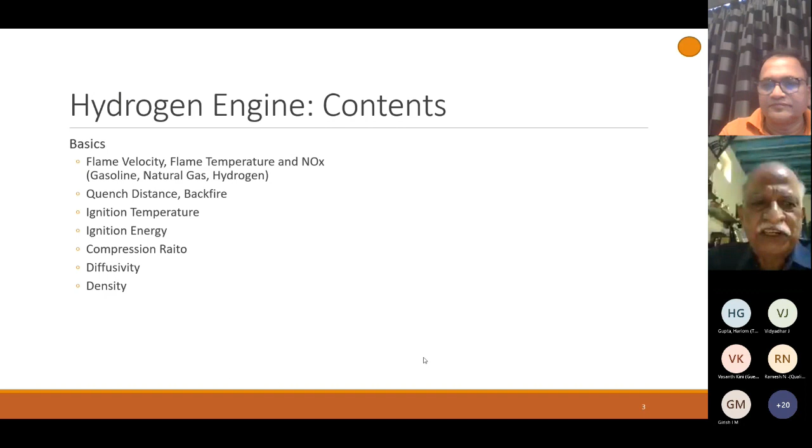Diffusivity and density. Based on these basics, we will describe the design challenges when we build a hydrogen engine, including ignition system, crankcase ventilation, and how we adapt hydrogen combustion to make it very efficient with less emissions within the engine, avoiding after treatment.

This drives us to the topic of lean burn engine, and lean burn engine with pre-chamber combustion seems to be ideal. We will give some practical examples which have been successful in applications like trucks, buses, and off-highway vehicles, where the duty is really heavy. At the end, we have listed references for those interested.

First, we will talk about combustion. Hydrocarbon combustion is very well known. When we burn hydrocarbon with oxygen, we get carbon dioxide and water. This is very simply said, but the combustion is never complete, so we get traces of carbon monoxide and hydrocarbon, which fall under the category of regulated emissions.

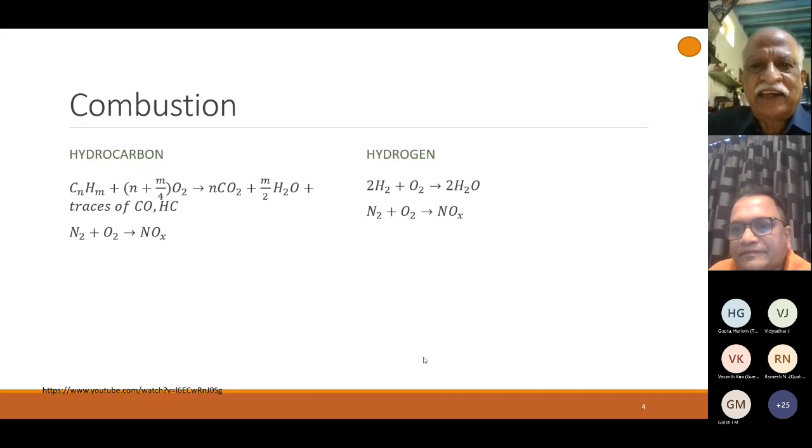Whereas we are able to burn hydrocarbon very well, hydrocarbon like gasoline or petrol, very well inside an engine at an air fuel ratio of 1.0, that is at ideal, chemically ideal proportion, we find burning hydrogen at chemically correct ratio produces exorbitant amount of nitric oxide, basically because hydrogen burns at a very high flame temperature. We will see the details a bit more later. So we got rid of carbon while we use hydrogen, but we still have nitric oxide.

So now we see the chemistry first, then we will see the physics of hydrogen combustion. We will see about flame velocity, flame temperature, and nitric oxide. We will also see what the flammability limits are of hydrogen compared to other fuels that we use today in spark ignition engines. We will talk a bit about the ignition energy and ignition temperature.

We have two types of flames, namely laminar and turbulent. You can see here the laminar flame is very quiet and very slow, and when it is turbulent, we find the flame front is wrinkled. On the right side, you will see a thin flame front, that is the edge of this flame, shown as a simple line, of thickness very small, delta L.

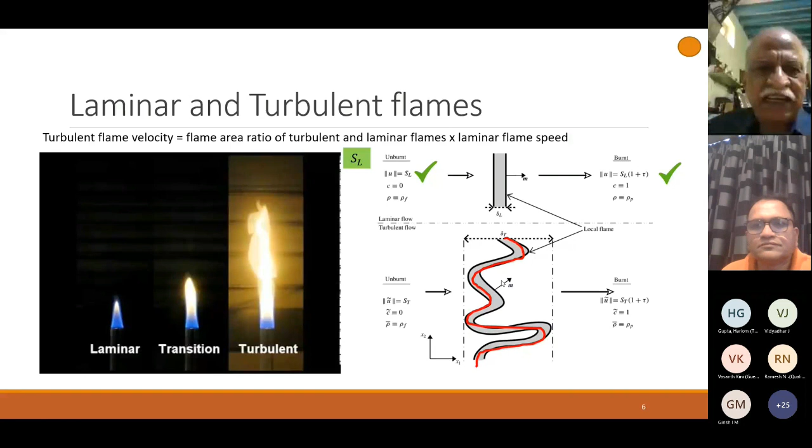When we look at the turbulent flame, we find that the flame area is enhanced, as shown by the red line. It is enhanced because the flame is highly wrinkled. So the flame area is essentially higher, but also the flame thickness apparently is more, and it is delta T. Delta T is higher than delta L, but it is looking like a brush.

The turbulent flame velocity is equal to the flame area ratio of turbulent and laminar flames times the laminar flame speed. If you look at a small infinitesimal portion of this wrinkled flame, it looks like a laminar flame. But the equivalent area of the laminar flame is many times higher than a normal laminar flame, and therefore we observe a very high turbulent velocity. That means the unburnt fuel has to move at a higher speed for the flame to remain at the same point in space. This is called the turbulent flame velocity. The burnt gases move towards the right at a higher velocity, which is enhanced by the increase in temperature.

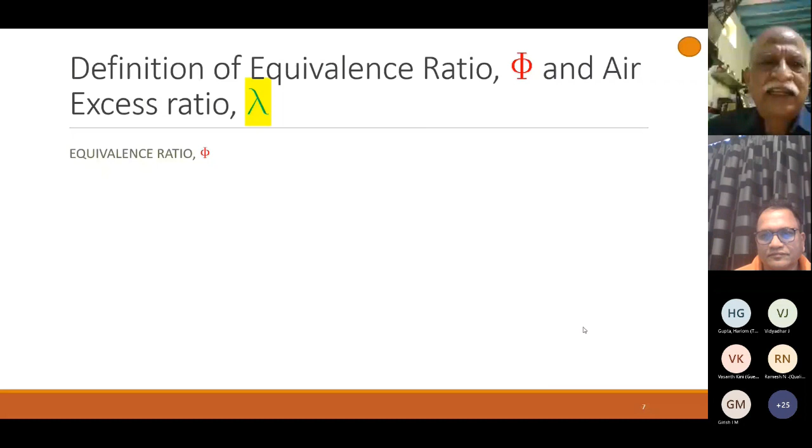Now we will define the equivalence ratio and air excess ratio. Engine engineers or designers like to use the term air excess ratio, while combustion engineers favor the equivalence ratio. So all the science of combustion deals with phi, and engine engineers handle lambda.

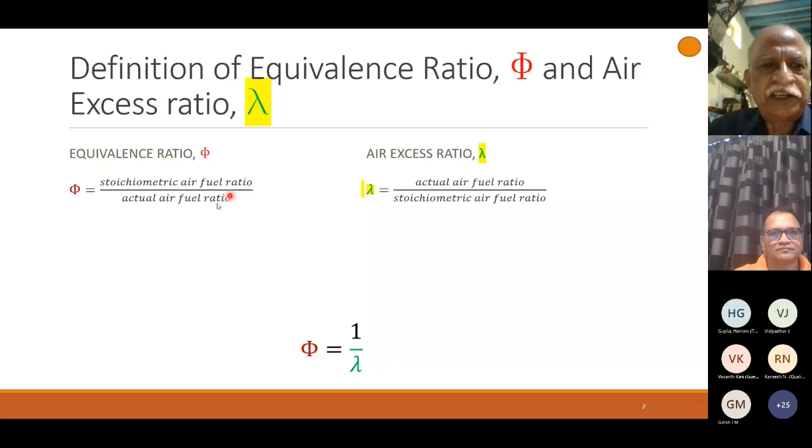The equivalence ratio is defined as the ratio of stoichiometric air-fuel ratio to the actual air-fuel ratio. Stoichiometric air-fuel ratio is the chemically correct air-fuel ratio. Lambda is the actual air-fuel ratio divided by stoichiometric air-fuel ratio. In other words, phi is the reciprocal of lambda. There is not much difference, but we must know this while studying the literature. When phi equals 1, combustion is stoichiometric.

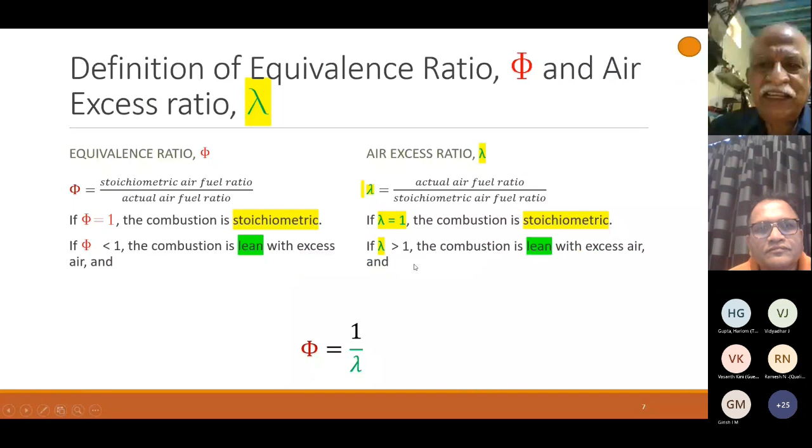When lambda equals 1, combustion is stoichiometric. However, if phi is less than 1, the combustion is lean with excess air, and for this, lambda should be greater than 1 for the combustion to be lean. And when phi is greater than 1, combustion is rich, and this corresponds to lambda less than 1. So we have defined the terminology.

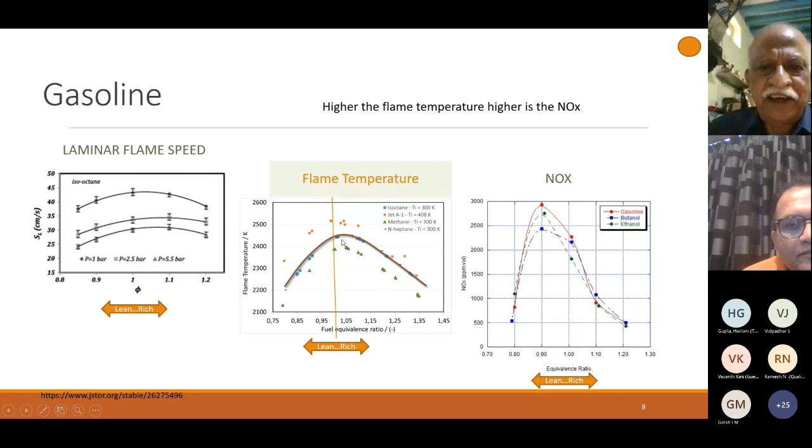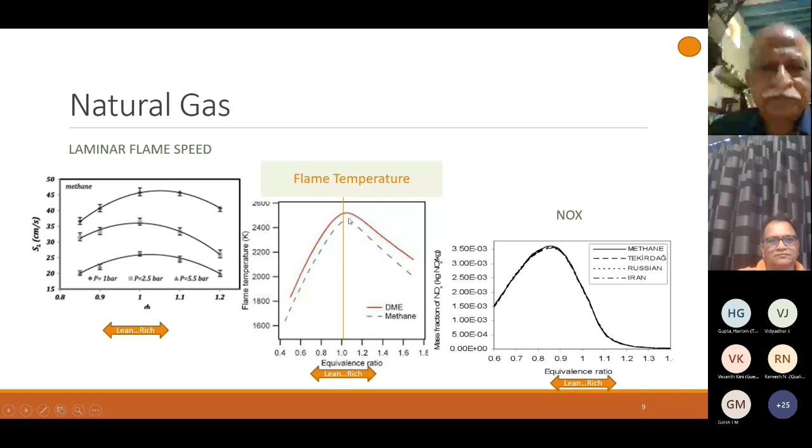Finally we come to hydrogen. It's very interesting - the graphs are similar in trend. NOx increases, then decreases, and around phi equal to 0.9, NOx is maximizing as we have seen in other cases. The flame speed also seems to maximize somewhere around equivalence ratio 1, but here you will see it is maximizing around 1.5, very near to 1. But the laminar flame speed is 7 times faster than gasoline or natural gas, so hydrogen burns very, very fast.

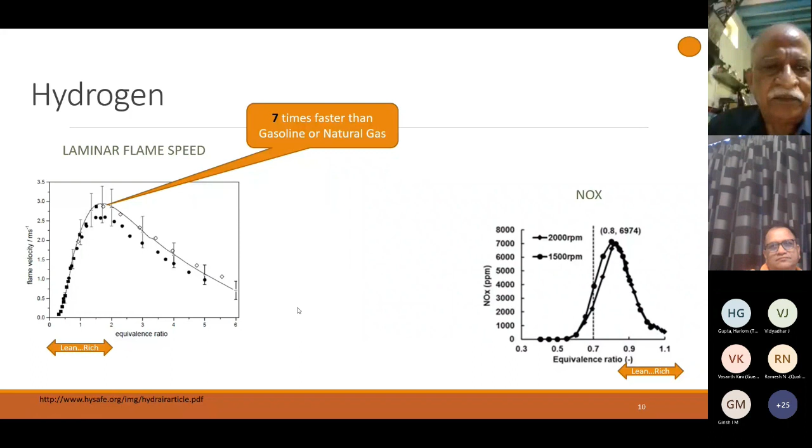The flammability limits of hydrogen are really very, very wide. We'll see the details in the next slide. If you take any fuel and have too much of it, the flame does not sustain itself. Or if you have too much air or oxygen, the flame cannot sustain itself and will be cooled by the excess air. So there is a very small range of fuel concentration where this flame can sustain itself and not be quenched or stopped. This is known as the flammability limit, and you have both upper and lower flammability limits for any fuel-air mixture.

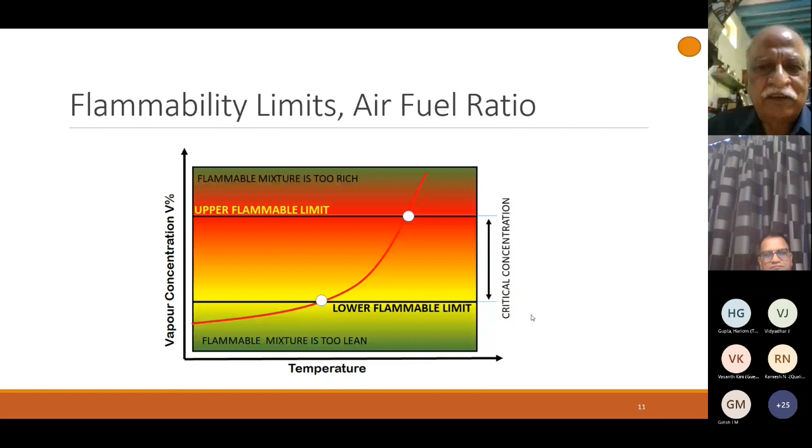We'll see some of the fuel-air mixtures we come across in daily life. First we see diesel, where we've plotted the fraction of fuel in air as volume percentage. The top one is diesel. On the left side you have lean and on the right side you have rich fuel. This arrow shows where the stoichiometric mixture lies. So essentially, we have a very narrow range for diesel flame to sustain.

Next we have methane, which is nothing but natural gas in essence. That also has a flammability limit range, slightly wider than diesel but not very wide. The width is around 10%, whereas for diesel it is about 5%. If you go for gasoline, you have a width of around 6.6%, which is slightly better than diesel and less than methane. That is because the number of hydrogen atoms per carbon in gasoline is more than in diesel.

If you come to hydrogen, you see the stoichiometric composition is somewhere here, also shown on the right side by this arrow. We have very wide flammability limits, meaning the range is from 4 to 75%, which is really very wide. Some of the calculations are given on the right side on top, showing how to estimate the stoichiometric composition.

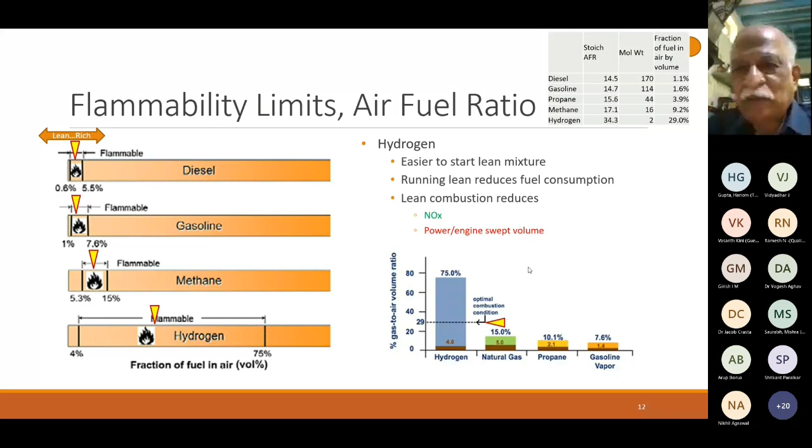Some of it is absorbed by the heavier molecules. So we don't want to increase the number of atoms per molecule in combustion. If you are able to run it lean, you are able to run the engine more efficiently. We will see some of the graphs after some slides. So lean combustion therefore reduces nitric oxide because we are reducing the temperature, and this has got a disadvantage: if you try to run lean, you burn less fuel, therefore you produce less power, so power to engine swept volume can drop. We will see how we can solve this problem.

Next is ignition temperature. Ignition temperature of hydrogen is very high. Of course, natural gas also ignites at a high temperature, but somewhat less than hydrogen, whereas gasoline can be ignited at a lower temperature. More interesting is diesel, which can ignite at a still lower temperature, but we are not considering that here for comparison, because we are going to burn hydrogen as a spark ignition engine fuel.

We cannot run it as a compression ignition engine fuel. Why can we not run it as a compression ignition engine fuel? The question is answered here itself: the ignition temperature is so high that regular compression methods cannot reach this temperature inside an engine. So this table gives the comparison of hydrogen and gasoline for ignition temperature.

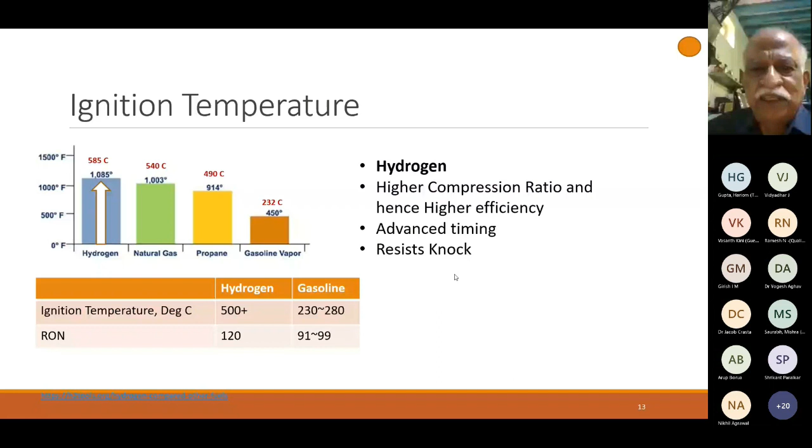Now we can go for higher compression ratio, and thermodynamically we can reach higher efficiency because of higher compression ratio. Also, we can go for really advanced timing and improve the efficiency of the engine. And hydrogen ignites at a high temperature, therefore it can easily resist knock. So we can advance timing and increase compression ratio without any nuisance of knock, which is a big problem both in gasoline and CNG engines.

Now comes the ignition energy. Interestingly, though we need high ignition temperature, we need very less ignition energy to strike a fire in a hydrogen air mixture. So hydrogen is easy to ignite a lean mixture. If we compare gasoline vapor, which needs 0.24 millijoules to be struck across the spark plug, in case of hydrogen we need only 0.02 millijoules to initiate fire inside the engine. So it is a very small amount.

But one difficulty is we should not have any hot spot inside the engine, like carbon deposit, which can initiate combustion inside the engine. Fortunately, we don't have carbon in the fuel to form a hot spot in a hydrogen engine, but the oil that passes the piston rings can form cakes after partial combustion and become a hot spot in a hydrogen engine. So we should try to avoid hot spot formation or cake formation due to oil burning inside the engine.

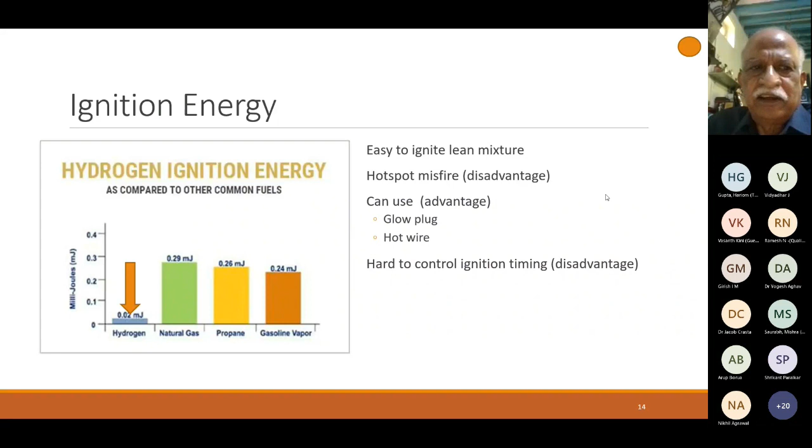So because the ignition energy is very less, accidents can happen. There are places where hydrogen is stored, and if it leaks into the surroundings, even a small spark of very low energy can create a big fire. So what we have to do is avoid unintentional mixing by using only hydrogen compatible materials and consider design and safety factors to prevent leaks.

We should anticipate ignition mechanisms and control them so that we can ignite the hydrogen oxygen mixture at our will. Last, we have to adopt the best practices and implement safe practices with inspection, assembly, operation, maintenance, etc. So these three are to be taken care of.

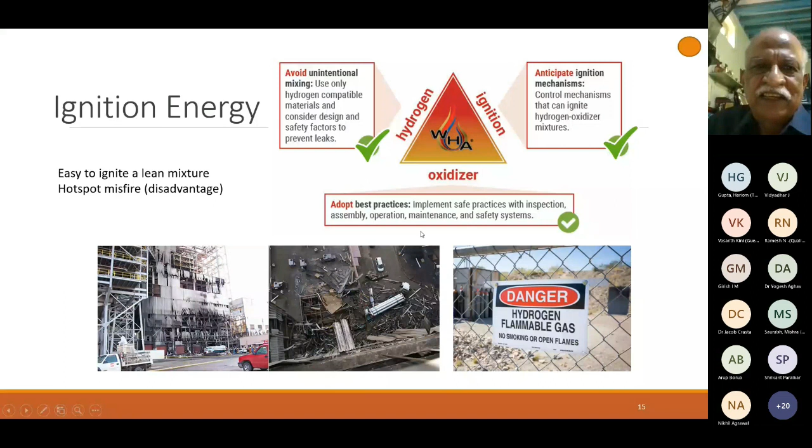And of course, we have said we can enable very high compression ratio. The theoretical Otto efficiency says your thermodynamic efficiency increases as compression ratio increases. Higher the compression ratio or the specific heat ratio, higher is the indicated thermodynamic efficiency. So we can enable a high value of gamma, or ratio of specific heats, by running the engine very lean. Compression ratio is limited by resistance of the fuel to knock, and this fuel is knock resisting, so we don't have a problem. A lean hydrogen mixture is less susceptible to knock than conventional gasoline and therefore can tolerate high compression ratios.

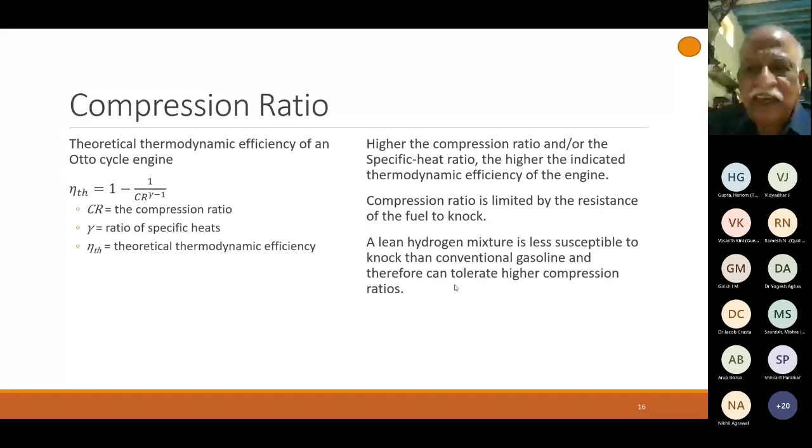So we are driving towards these parameters. We can go for high compression ratio. We can go for a lean mixture for better efficiency as well as lower nitric oxide.

If you see the thermodynamic efficiencies, you can beat diesel when you use hydrogen. That means you can get up to 5% better thermodynamic efficiency, or fuel consumption will be at least 10% better in case of hydrogen. This 10% is based on the calorific value of hydrogen. If we consider the grams of fuel consumed, hydrogen consumption will be around one third of diesel, basically because hydrogen has a lot of calorific value, that is calories per gram of hydrogen.

So if you get, in case of diesel, 190 grams per kilowatt hour, if you run hydrogen you will get around 80 grams per kilowatt hour. So now we have seen some of the chemistry. We will see the physics of combustion.

We'll see the flame quench distance and backfire. Quenching distance is known for a long time, as we have seen in Davy's lamp. This lamp was invented by Sir Davy for use in the mines. The flame inside the lamp will not propagate to the outside where there is a lot of combustible gases in the mines. The flame does not travel outside because the holes are so small, smaller than the quench distance, and the flame is quenched at the hole itself.

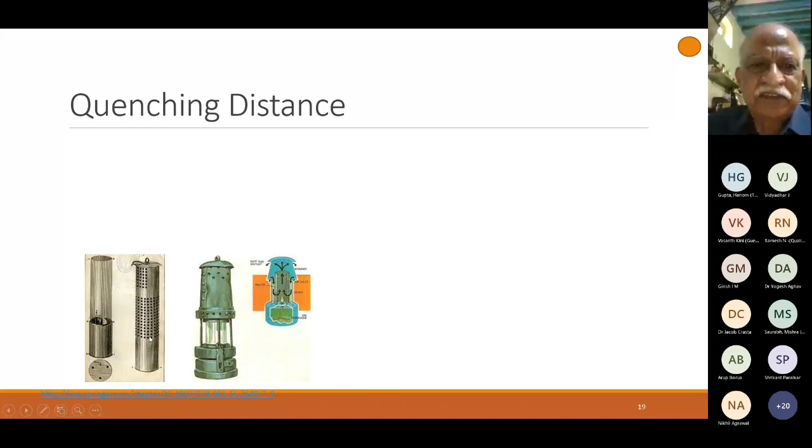We'll see one picture. If we have a small hole and there is a flame propagating from left to right, it will be stopped at the hole because the hole has more surface area, and it loses heat vigorously. So the flame is stopped ahead of the hole. This is the principle of Davy's lamp.

Modern science says if you plot the quenching distance and spark ignition energy on a log-log plot - that is, a logarithmic x-axis and logarithmic y-axis - you will find these two parameters, namely the ignition energy and the quenching distance, fall on a line.

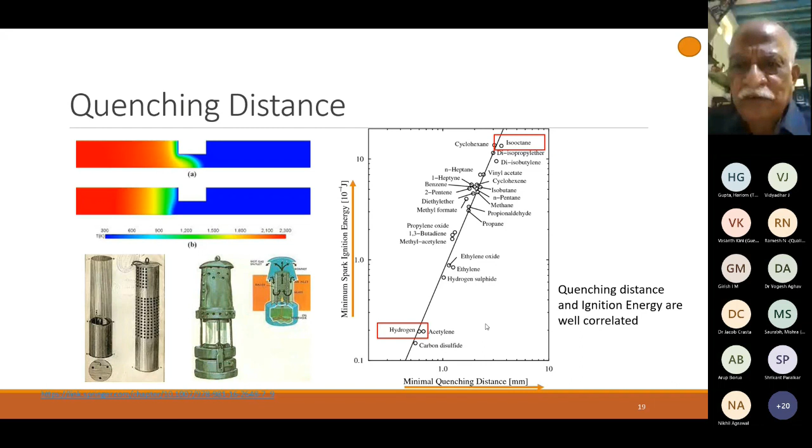Isooctane, which is nothing but gasoline, is somewhere at the high end. That means it needs a lot of ignition energy, which we saw in the previous slides, and also the quenching distance is high. Hydrogen is at the lowest end - it has a very low ignition energy and a very low quenching distance. So ignition energy and quenching distance basically arise from the same physical phenomenon, and we find an excellent correlation between the two parameters.

We'll see a table here. You can see hydrogen has a quenching distance of 0.64 and gasoline 2.8. So we can handle gasoline somewhat better than hydrogen, especially near the valve seats. We'll see the example. Also, the ignition energy is shown here - it is 2 times 10 raised to minus 5 joules for hydrogen, and for gasoline it is 24 times 10 raised to minus 5 joules.

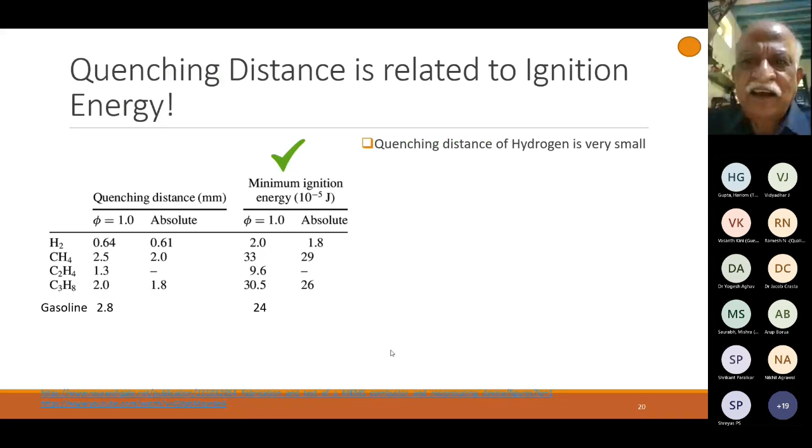So quenching distance of hydrogen is very, very small. Therefore, hydrogen burns very close to the wall of the combustion chamber, and this can cause backfire.

How does backfire take place? We have an engine here, and we cannot ensure perfect sealing between the valve and the valve seat in the cylinder head. If the imperfect seating is larger than the quench distance, then the fire can propagate from the engine cylinder to the inlet air. This can propagate up to our fuel admission point, and the entire thing can cause a startling noise - it can frighten a person running the engine. So backfire can pass through minute gaps at the valve seats.

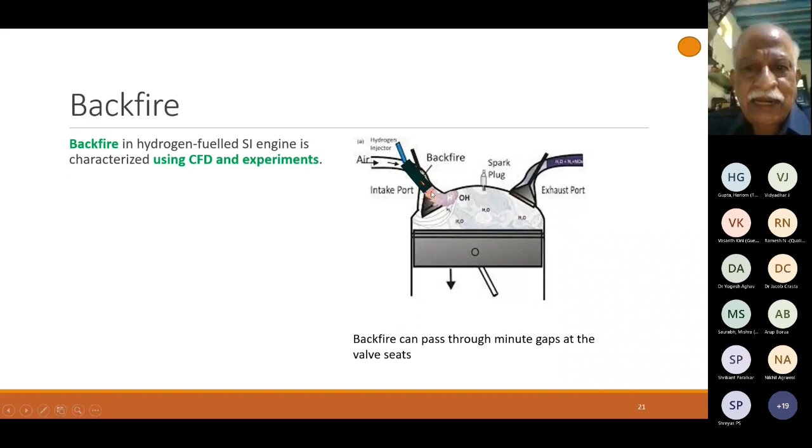Backfire in hydrogen-fueled SI engines is characterized using both experiments and CFD. CFD helps a lot here to characterize this backfire.

Of course, the fire can be sustained only if there is sufficient temperature available. So the hotspot's minimum temperature for occurrence of a backfire is 950 K, which is around 670 degrees centigrade. We should not have any hotspot, or if at all we have a hotspot, the temperature should be less than 670. So the spark plug, or anywhere there is a carbon deposit, should be maintained at a temperature less than 670 by proper cooling. Hotspot location does not influence backfire except for the timing of its origin.

Backfire propagation is characterized by deflagration. Deflagration is not an explosive combustion - it is a gradual propagation of fire, but it can be irritating and sometimes frightening. So we have to maintain the spark plug and the exhaust valves, or any other possible hotspots, to temperatures less than 950 Kelvin, which is around 670 centigrade. These have to be simulated by CFD to check the danger of backfire.

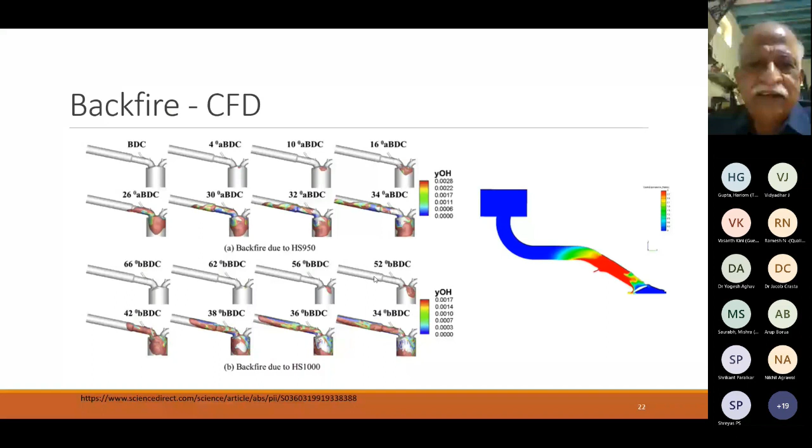Now we come to combustion only, the physics aspect of combustion. Higher diffusivity of hydrogen and lower density of hydrogen must be considered. So we will see what diffusivity is.

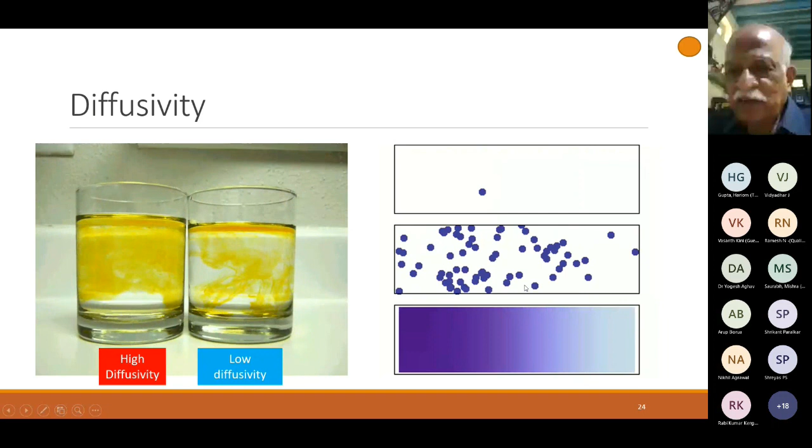In case of gases, we can see an example. You can have a diaphragm and break it - all of a sudden the gases on the left side diffuse to the right side. If you go to the molecular level, you can see the molecules are randomly moving inside the volume, and after the diaphragm is broken, they tend to diffuse towards the right side where the concentration is less.

On the left side, you can see the distribution of hydrogen soon after injection in the cylinder. It is uniformly getting diffused, whereas gasoline stays very close to the injector for a long time. This higher diffusivity is characteristic of hydrogen's property in air, and it creates a uniform mixture. Normally in a gasoline engine we struggle to create a uniform mixture, but in case of hydrogen we get it very easily.

It enables complete combustion and hence improved efficiency. Also, because it diffuses fast along with its enhanced flame speed, we can run the engine at very high speeds. Because it can run at high speeds, we can produce more power for a given volume of the cylinder. And because it diffuses fast, if it is let out to the atmosphere, it will gradually go up in height, enabling reduction in danger.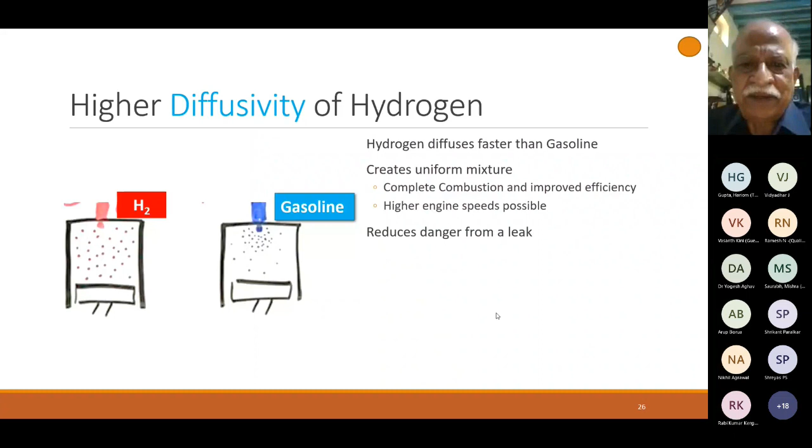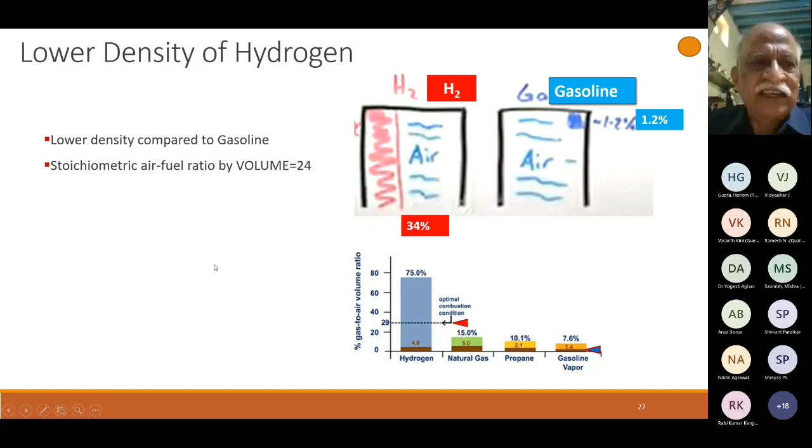I mean, it is less dangerous to let out hydrogen in the open than letting out gasoline vapor. But the lower density is a big problem. We have seen the characteristic stoichiometric ratio is 29, but the volume occupied by hydrogen is 34% of the total cylinder volume for stoichiometric combustion. In case of gasoline engine, it is hardly 1.2% of the volume occupied in the cylinder. So lower density compared to gasoline makes a lot of volume occupied by the fuel, which otherwise could have been occupied by air.

So we are unable to burn as much fuel as in gasoline, and hence a hydrogen engine, if run as a gasoline engine, would produce less power. Reduced power is generated when compared with gasoline because we can take in less fuel. It is like we say there is an elephant in the room. We need a very large fuel tank, and it occupies a lot of space in the vehicle.

So we have seen both physical and chemical properties of combustion. We'll see how we can design a hydrogen engine. First, let us look at the heating value. The lower heating value is very good when we express in megajoules per kg. For hydrogen, it is far higher than a liquid fuel like gasoline or a gaseous fuel like natural gas.

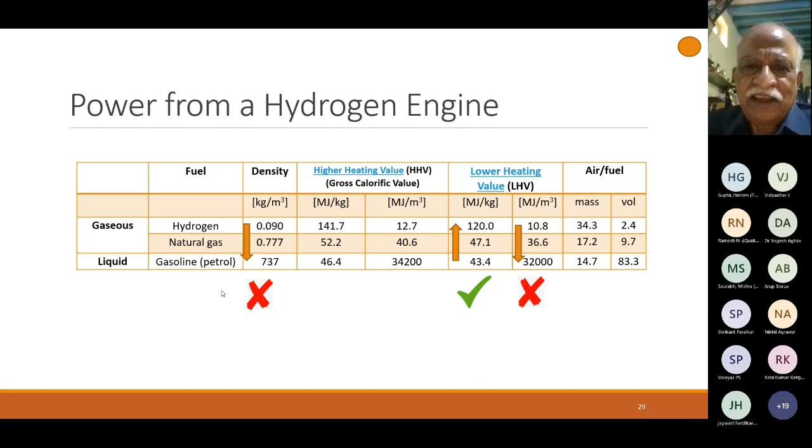But its density is very low, as we have just seen. If we express the heating value per unit volume, you find liquid fuel wins hands down. So we need some special methods to handle hydrogen, or handle this fuel, inside the engine.

So let us see if we can run the engine at lambda equal to 2.2, which is the limit for lean combustion. So we can produce low nitric oxide. But when we look at the density, the fuel tank size is large and the engine power is low. We'll see a graph a bit later. And we can run the engine at high speed, which is advantageous.

Quenching distance is very low, so we must be very careful while designing the engine. But it is possible by purely conventional and other methods to solve this problem. Diffusivity is very high. This is because the molecules of hydrogen are very small and it can diffuse very, very fast. So this can create some problems. We'll see how we can overcome it. A specific solution has to be found.

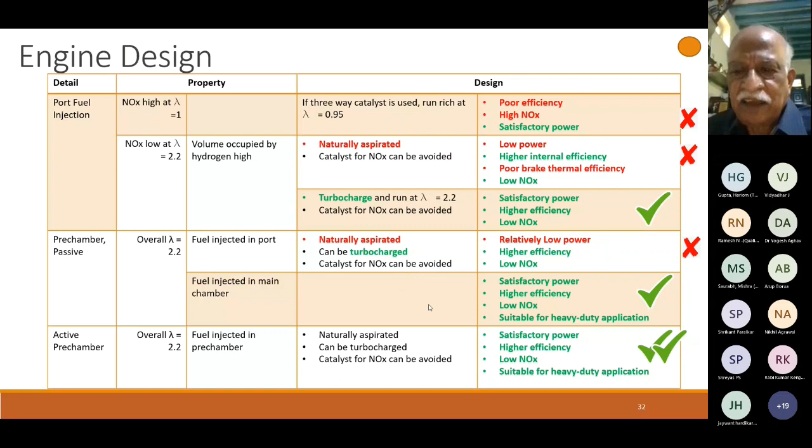But we can go for turbocharging to further increase the power. So we can see only we have three options as shown here, and in two cases we have to turbocharge. In two cases we can turbocharge, but in pre-chamber passive we can either turbocharge or naturally allow the engine to be naturally aspirated. Ignition energy is very low, therefore igniting hydrogen is easy.

Gasoline injection systems can be used, ignition systems can be used. However, at very lean air-fuel ratios, if at all you want to run at that, the flame speed reduces considerably and the use of dual spark plug system is sometimes preferred.

But this is for an engine where we have spark plug and fuel admission are in separate chambers. A waste spark system, which is very common in gasoline engines, should not be used for hydrogen engines because any remaining hydrogen can be easily ignited, and this wasted spark can be a source of pre-ignition.

In case of gasoline engines, we very often resort to waste spark systems. That means we spark both at the end of compression or during the compression and during the exhaust stroke. This makes our circuit design a bit simpler, and it is less expensive than non-waste spark systems. But we have to spend a little money extra for hydrogen engine to avoid wasted spark system.

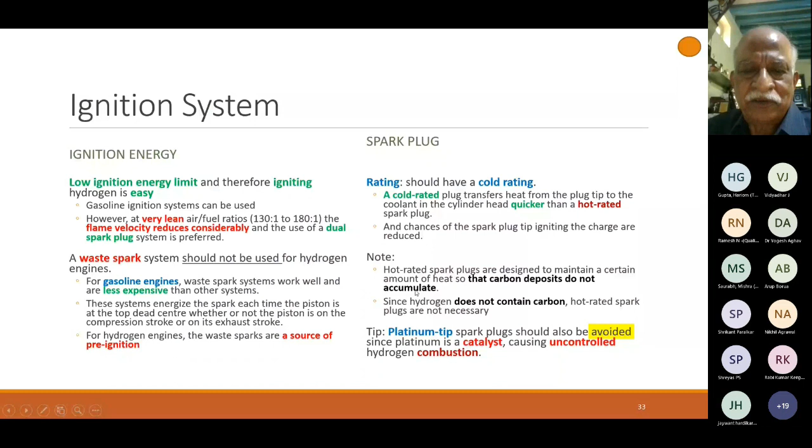Crankcase ventilation is a very important subject. Unburned fuels seep past the piston rings and enter the crankcase. Since hydrogen has a very low ignition energy than gasoline, any unburned hydrogen entering the crankcase has a greater chance of getting ignited. Hydrogen should be prevented from accumulating by proper ventilation of the crankcase. Ignition within the crankcase can either be a startling noise or result in an engine fire.

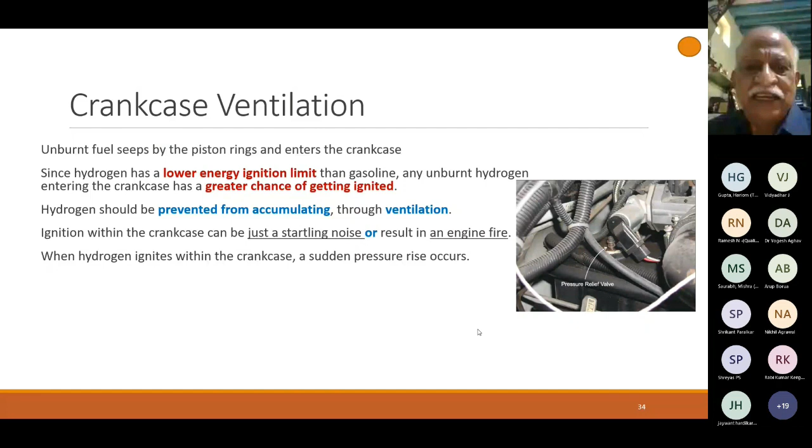Engine can catch fire at the breather. When hydrogen ignites within the crankcase, there is a sudden rise in pressure, and this is what causes the noise or the engine fire. Therefore, what we need is a pressure relief valve to relieve this pressure instantaneously, and this is usually installed on the rocker cover. Many times we introduce pressure relief valve even for our CNG engines.

Now, not only hydrogen, also the burnt gases can seep by the piston rings into the crankcase. Since the exhaust is water vapor, water condenses in the crankcase when proper ventilation is not provided. If there is no proper ventilation, the water will condense, and mixing of water into crankcase oil reduces lubrication ability, and this will result in higher engine wear.

There are some oils which don't retain water and water can be separated. So when we specify oil for a hydrogen engine, we should specify special oil which will settle water at the bottom of the sump, and that can be drained. This is apart from our effort to ventilate the crankcase properly.

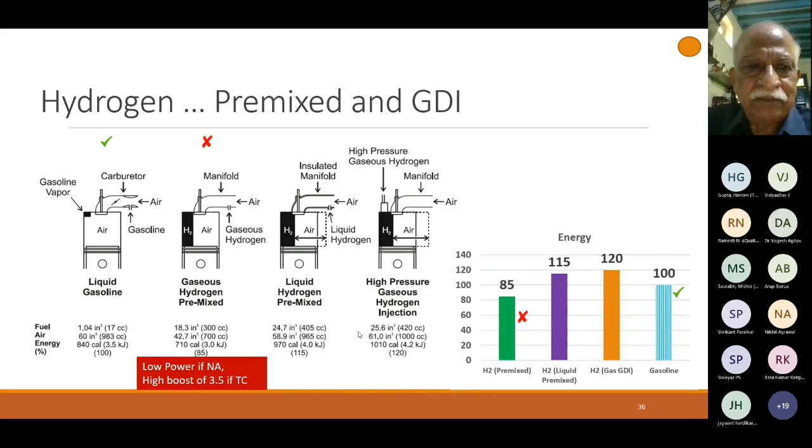So we produce lower power if naturally aspirated, and you might need very high boost ratio for turbocharging, if you go for turbocharging to increase the content of air and hydrogen inside the engine. But the boost ratio is very high and you need very special turbocharging.

You can have insulated manifold and inject liquid hydrogen in the manifold. Then we will get around 115, slightly more power, 15% more power than a gasoline, which is good, but you have to have liquid hydrogen stored in the vehicle.

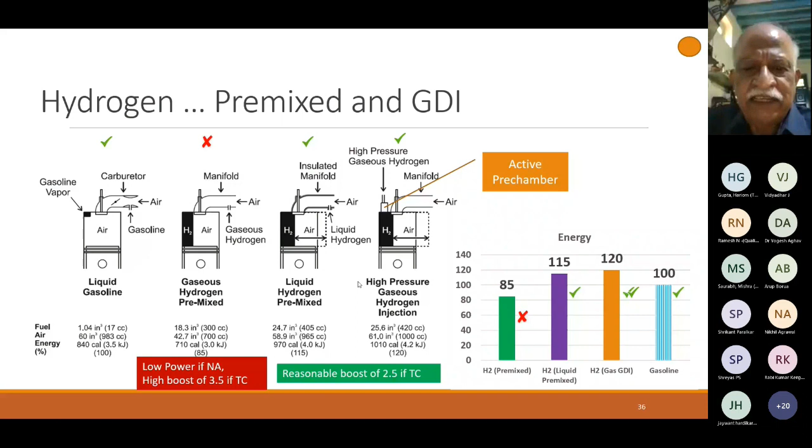Alternately, we can have a high pressure gaseous hydrogen injected in the pre-chamber, and we can produce 120% of gasoline power, and this is an excellent method because you don't have to handle liquid hydrogen, which is very complicated, which needs complicated engineering. And we can work with a reasonable boost of 2.5, even with a turbocharged engine.

So we will see how we select the engine combustion. You can have stoichiometric combustion, you have high nitric oxide, so better we avoid stoichiometric combustion. We can have lean lambda equal to 2.2 combustion. We have low nitric oxide, so one big headache is solved.

Whether we go for naturally aspirated or turbocharged, we have to make a decision. We will produce less power with naturally aspirated option, so we would like to rule it out. If you go for turbocharging the engine, you can produce relatively higher nitric oxide, higher boost. So it is not very nice.

If you go for turbocharging and intercooling, we can produce very low nitric oxide, and we prefer that design. We have various options of admission fuel. One is port fuel injection. It demands very high boost if at all we turbocharge, because we want to turbocharge the engine. And boost is 3.5, which is very high. We would like to avoid it.

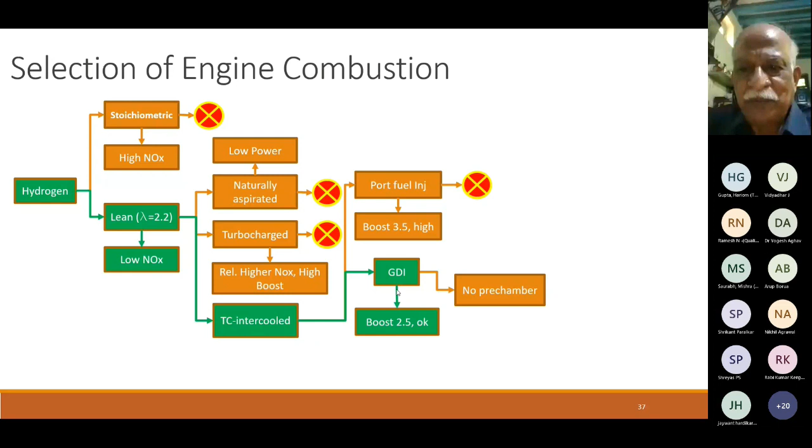We can go for direct injection of gas in the cylinder. Boost is 2.5, okay. We have a choice whether we have a pre-chamber or a no pre-chamber. If there is no pre-chamber, the hydrogen diffuses fast and ignition limit problems occur. Also, backfire can happen because this fuel air mixture can leak past the small gaps, and special material for hydrogen embrittlement everywhere inside the engine.

So we would like to avoid it. Then you have an option to go for a pre-chamber. Only the pre-chamber will be of special material. We can go for passive or active pre-chamber. When you go for passive pre-chamber, you have backfire and special material for hydrogen embrittlement, because the fuel is injected in the main chamber. We will see the picture. So we'd like to avoid that.

You go for active pre-chamber. There is no backfire, special material only for the pre-chamber, and you can make a choice. So this is the tree or choice tree, and how we arrive at this system.

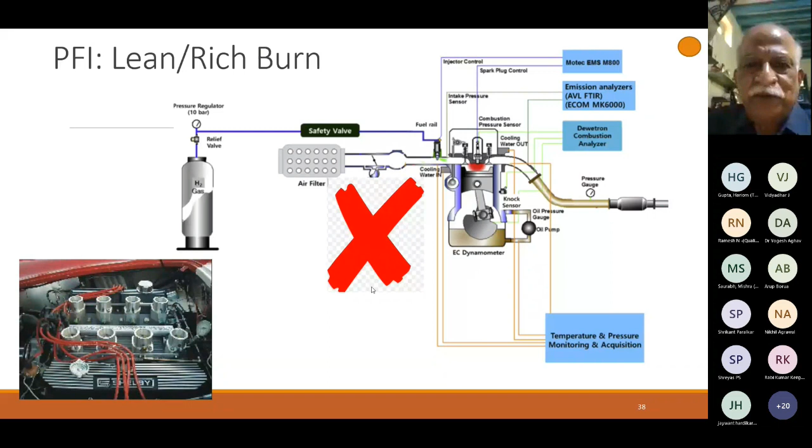Incidentally, we cannot use a three-way catalyst very well at lambda equal to 1 for hydrogen. We have to run it slightly rich so that hydrogen is available in the three-way catalyst. But anyhow, in the previous slide we saw we would like to avoid stoichiometric combustion, so there is no question of three-way catalyst at all.

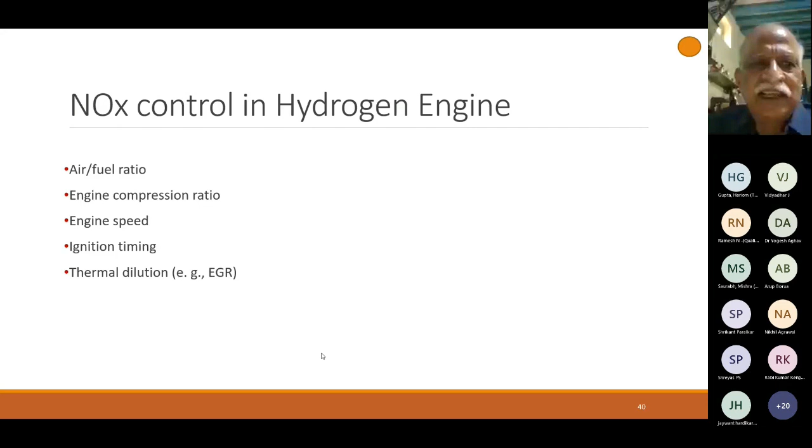Okay, so we have to treat only NOx emission, which can be done with lambda equal to 2.2. So NOx control in hydrogen engine is by running at very high lambda, or very high air fuel ratio. We run at very high speed and we control the ignition timing. We can also introduce a small amount of EGR to reduce the flame temperature, even at lambda equal to 2.2.

This is a technique only for academic study, where you can use a catalyst at lambda equal to 0.9 and reduce all nitric oxide to nitrogen and water. But at what expense? We have very poor combustion efficiency, as well as we produce less power. So this is a thing which we would like to avoid.

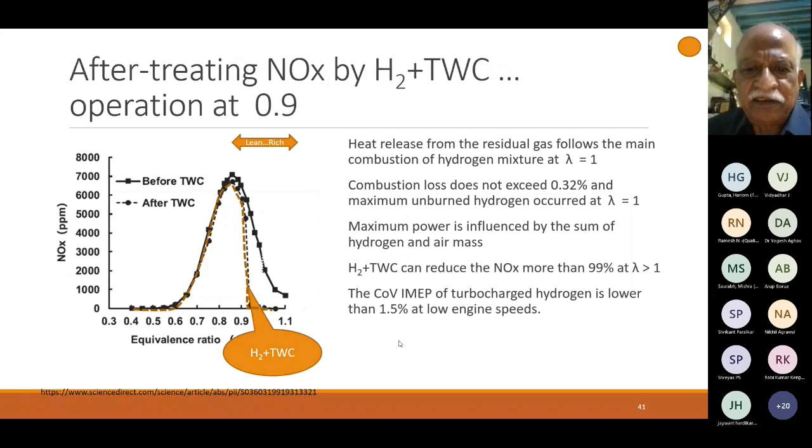Why is this improvement taking place? It is because of the reduction in pumping losses. We handle less and less hydrogen and air to be pumped into the chamber at high depressions. So this is the heat release from the residual gas, which follows the main combustion of hydrogen at lambda equal to 1 that we have seen.

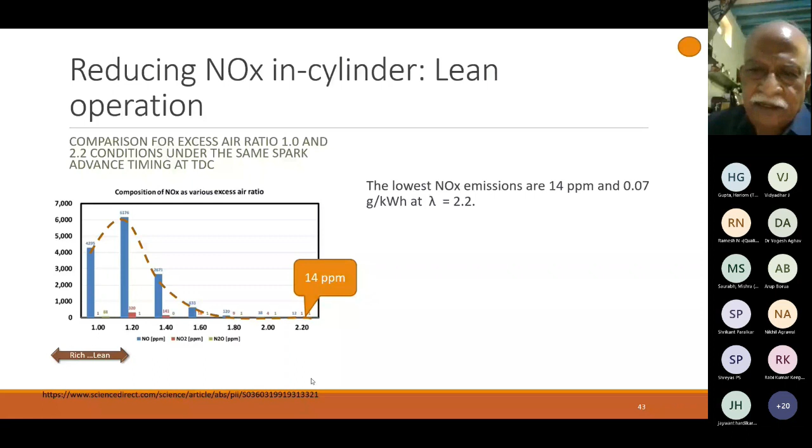We again want to reiterate the reduction in NOx at lean conditions. You can see that NOx is 4,290 ppm at lambda equal to 1, or when it is stoichiometric combustion. When we run lean, we can produce as low as 14 ppm. So the choice is lean combustion, and we can run stably at lambda equal to 2.2.

Lastly, we come to turbocharging. For lean combustion of hydrogen, turbochargers have to provide around twice as much air mass as they do in gasoline engines. That is because we are running at lambda equal to 2.2. However, lower exhaust temperatures result in a lack of energy for producing further propulsion for running the turbocharger at the turbine. This discrepancy cannot be resolved with conventional turbochargers.

So a special feature of the turbocharger is the coaxial arrangement of two compressor stages, which are driven by the turbine or a supporting electric motor using a common shaft. The process air flows through the first compressor and is cooled in the intercooler, then compressed again in the second stage. So we'll see some pictures.

These are some V engines. Here we have a single-stage turbocharger, but here we have a two-stage compressor. The output of this compressor is cooled at the intercooler, then goes to another compressor, and after increasing the pressure, it goes to another intercooler for better cooling. The temperature is maintained around 20 degrees above room temperature and fed to the inlet manifold.

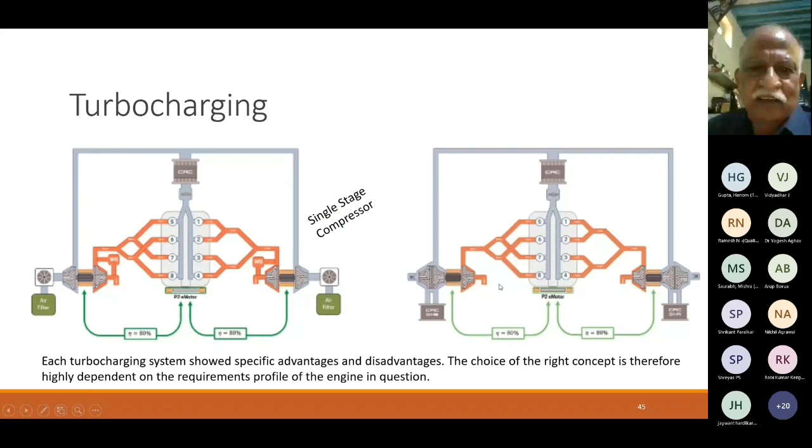Two-stage compressors with intercoolers are very common. If we don't want that, you can have an electric motor-driven compressor. You can manage these valves in such a way that the output of one compressor goes to another compressor, and then we increase the pressure and it goes to the intercooler.

Or we can have an arrangement as shown on the right, the boost second stage compressor, which is run by an electric motor, can be either bypassed or allowed to run to increase the pressure. So these are various possibilities, and the control becomes very complicated.

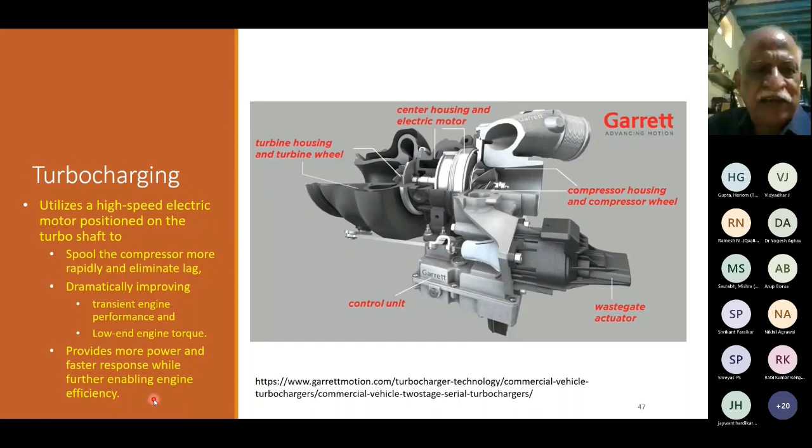So this utilizes a high-speed electric motor positioned on the turbo shaft to spool the compressor more rapidly and also eliminate lag. It dramatically improves the transient engine performance and low-end engine torque. It provides more power and faster response while further enabling engine efficiency.

This is another way of having a two-stage turbocharger. You can see there are two compressor stages, one on the left and another on the right, and two turbines, one on the right and another on the left. The engine-out exhaust gases flow into this turbine, and the outlet of this turbine is fed to an axial turbine here, and the gases flow out to the silencer by this path.

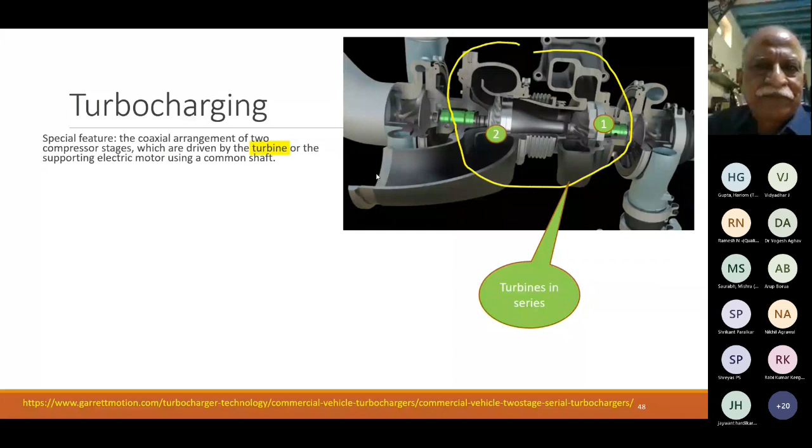You have two compressors. This is the first stage compressor, and it is cooled after first stage compression. Then it goes to the second stage compressor, and totally we can have compression 4 to 5 times that of atmospheric pressure.

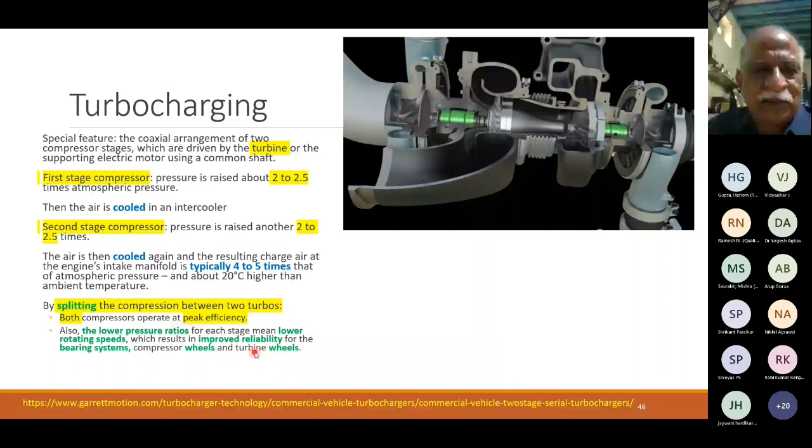Because of intercooling, the temperature will be around 20 degrees higher than room temperature. By splitting compression between two turbos, both compressors operate at peak efficiency. Also, the lower pressure ratios for each stage mean lower rotating speeds, which results in improved reliability for the bearing systems, compressor wheels, as well as the turbine wheels.

Of course, we can introduce VGT. You can have narrow vane opening or wide vane opening and manage very high compression ratio in the turbocharger, but not better than 3 for small engines.

We have to have special materials to withstand hydrogen embrittlement. The valves and pre-chamber must be made of stainless steel 316L, and we should have hard face for the valves so that there is no leakage of hydrogen air mixture in the valve seat gaps due to wear and tear.

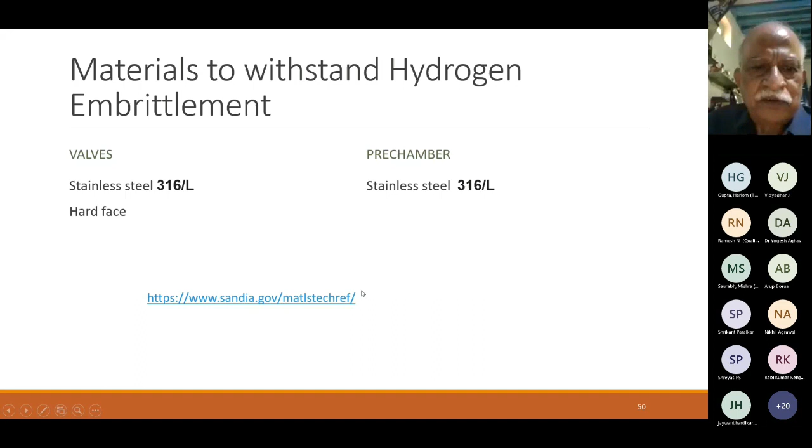A lot of material choice for hydrogen engine is available in this reference. I request the audience to search in this reference for the suitable materials.

So now we are narrowing down to heavy duty lean burn, and there are direct injection engines with pre-chamber system. We will see gasoline and then we will see hydrogen.

The IC engines are continuously improved with compression ratio increase and use of Miller cycle. These IC engines are running using gasoline, and they have passive pre-chamber with a spark plug in the pre-chamber. The fuel is injected in the main chamber. There is no risk of backfire in case of petrol engines.

Then you have cooled EGR with both passive pre-chamber spark plug and active pre-chamber spark plug. In active pre-chamber spark plug, we inject fuel in the pre-chamber. So this is just coming up.

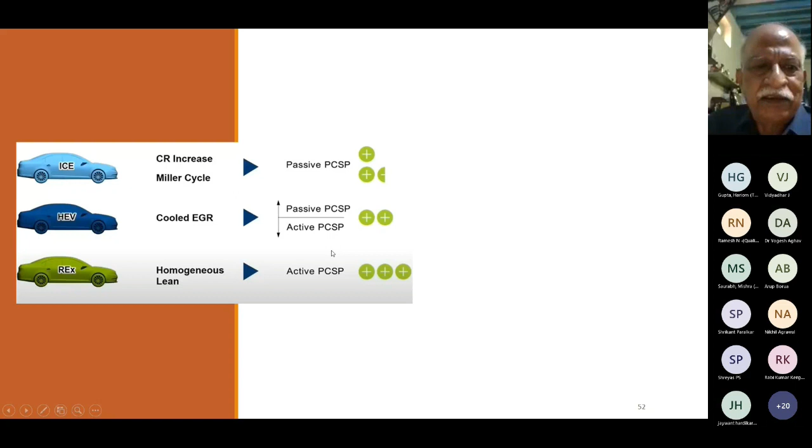So how is it done? The pre-chamber is looking like this with cooling passages. And we'll see a movie, of course. The spark plug is inserted in the pre-chamber.

The fuel is injected in the main chamber. Fuel and air are mixed well during the compression stroke, and the fuel air mixture is pumped into the pre-chamber through small holes here, 4 or 5 holes. So it is pushed into the pre-chamber.

At the right timing, the spark ignites the fuel air mixture in the pre-chamber. Once it ignites, there is a sudden increase in pressure, and the burnt fuel air mixture rushes through these holes in the form of jets. So essentially what we are having is a very extended spark plug in the form of jets, and that can fire very lean mixtures effectively.

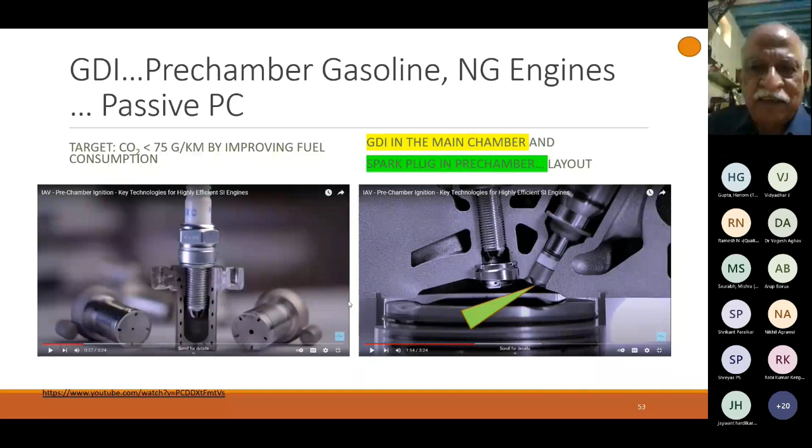We'll see a picture. So this is how the pre-chamber looks like, and these are the holes, and this is the fuel injector.

When the fuel air is mixed and during the compression stroke, the piston is moving upwards, the fuel air mixture is pushed into this pre-chamber, and the spark ignites the fuel, and when it is ignited, the pressure rises and you produce intense jets.

And the entire fuel air mixture in the main chamber catches fire and burns, and it produces power.

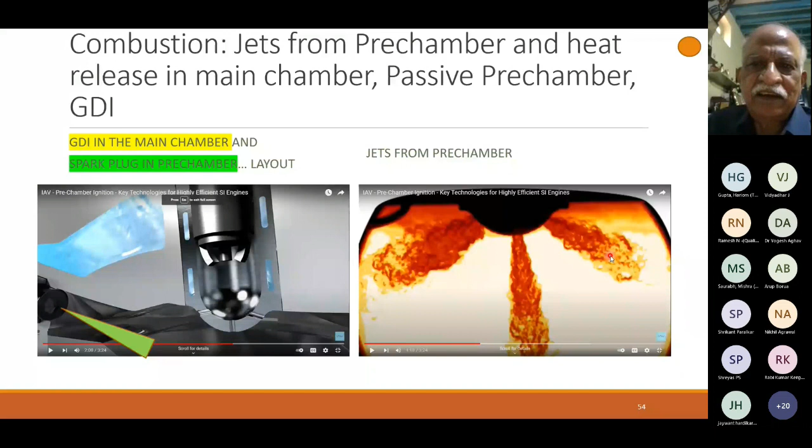If you have the pre-chamber arrangement and a spark plug inside the pre-chamber, we get a heat release which is really fast, and this increases our efficiency, with more surface area and faster heat release, hence better fuel economy.

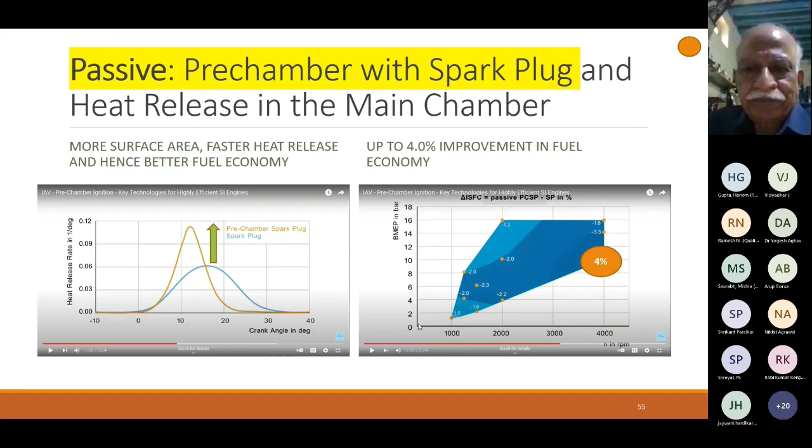On the other hand, we have the active pre-chamber spark plug system. We have a GDI in the pre-chamber. The fuel is injected in the pre-chamber, and there is a spark plug, as we have seen in the passive pre-chamber.

We have a very rich mixture inside the pre-chamber, but we know hydrogen can burn either very rich or very lean without much problem. The average air-fuel ratio is around 2.2, but when the spark occurs inside the pre-chamber, we have a very rich mixture there. So usually it would be very difficult to start combustion because of flammability limit problems if the fuel was anything other than hydrogen. But here, because we have hydrogen, we are able to manage good combustion.

This has to be tried a bit on computer for the residual fraction around the spark plug, because it is possible that during the small period when some amount of fuel is burning in the pre-chamber, we end up producing very high nitric oxide. So to avoid that, we use the idea of having some exhaust gases very close to the spark plug, and not sufficient fuel is made available near the spark plug, and this reduces nitric oxide.

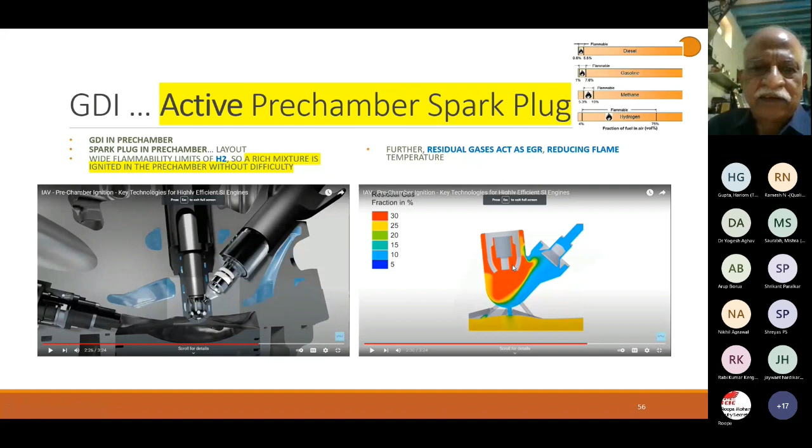As we have seen, the active pre-chamber can run at very high air-fuel ratio, or lambda equal to 2.2, and this system can offer very good fuel consumption, or very low fuel consumption, compared to a simple system of having a spark plug in the main chamber.

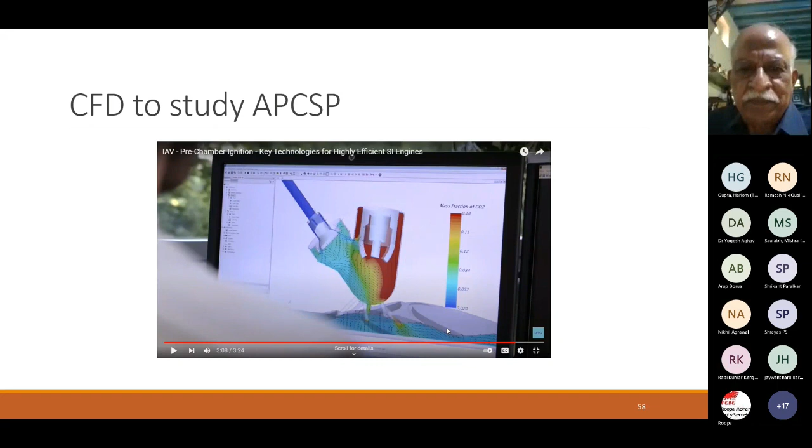Also, we can extend the combustion safely up to lambda 2.2 without having any problem of flammability limits at high speed engine running, and this reduces nitric oxide 50 times compared to stoichiometric combustion. This also improves fuel consumption, with up to 9.7% improvement in fuel economy possible. And of course, a lot of CFD, computational fluid dynamics, is necessary to properly locate the spark plug and the fuel admission valve, so that we have advantages regarding nitric oxide and fuel consumption.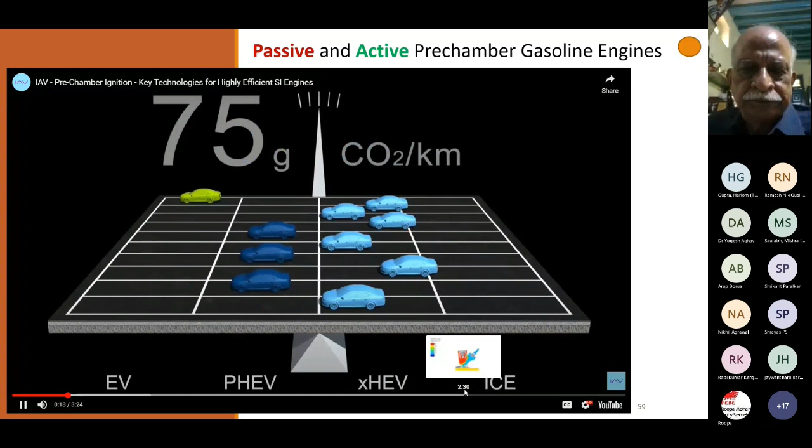Never before has it been so important to cut fuel consumption and pollutant emissions of vehicle powertrains. To achieve the future fleet target of less than 75 grams of CO2 per kilometer, the efficiency of combustion engines must therefore be significantly enhanced.

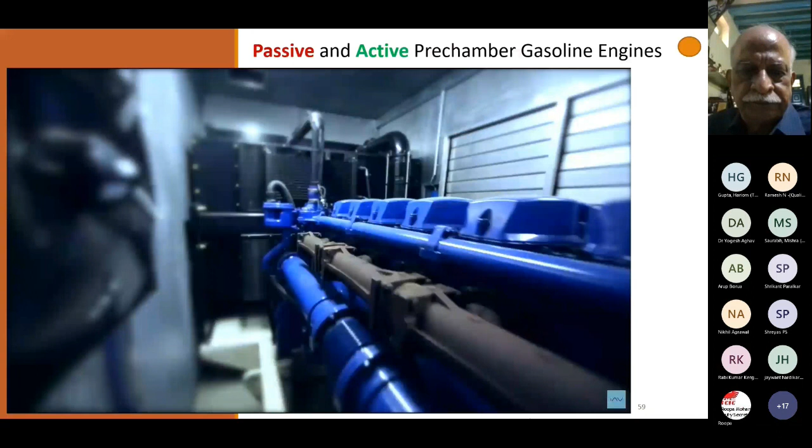Pre-chamber ignition is a technology that helps make combustion more efficient. It has been used for many decades in stationary large-bore gas engines. The pre-chamber is currently also used in Formula One racing for high-performance levels in highly dynamic operation. How can these two worlds be brought together? IAV has selected a new approach to the pre-chamber and developed solutions that make future use in passenger cars highly promising.

Usually, when we're thinking about a pre-chamber spark plug, it's just a spark plug with a cap on it. We wanted to go a different way. We wanted to integrate the pre-chamber spark plug into the entire engine. This means, on the one hand, integration into the combustion process, and on the other hand, integration of the pre-chamber into the cylinder head itself.

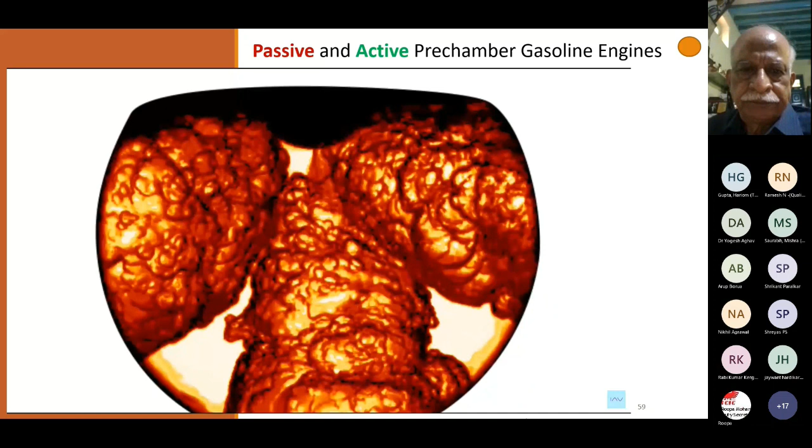The principle is simple. After the fuel mixture has been ignited in the pre-chamber, flame jets pass into the main combustion chamber. Here, they act as multiple space-filling ignition points for constantly stable, rapid burning of the mixture, providing major advantages in terms of both knock and consumption in stoichiometric operation.

When we think about putting a pre-chamber spark plug into a series car, we have to cope with several problems. On the one hand, we have very high loads and very low loads. On the other hand, we also have very high and very low temperatures. In addition, we also have to make sure to enable catalyst heating. And we at IAV found some solutions to exactly these problems.

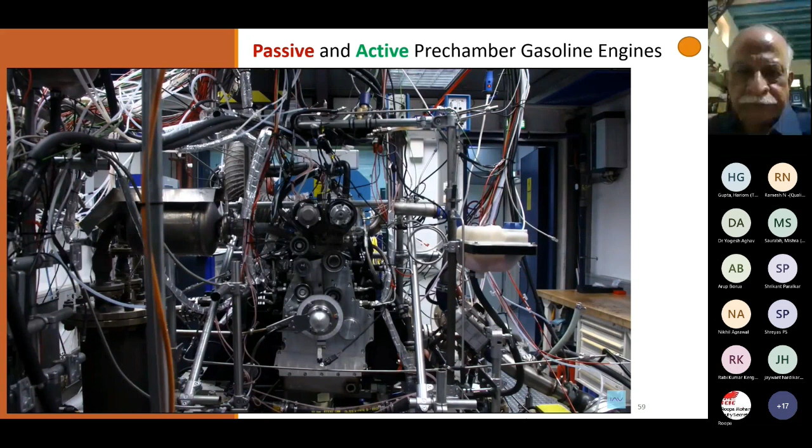We see pre-chamber ignition as an evolutionary technology. On one hand, we are working on a passive solution where the mixture only gets to the pre-chamber via the main combustion chamber. This is a low-cost variant that is easy to implement and achieves 2 to 3% fuel reduction in our tests. On the other hand, we are also developing an active version with an additional special air-fuel low-pressure injection system, achieving 7 to 8% fuel savings.

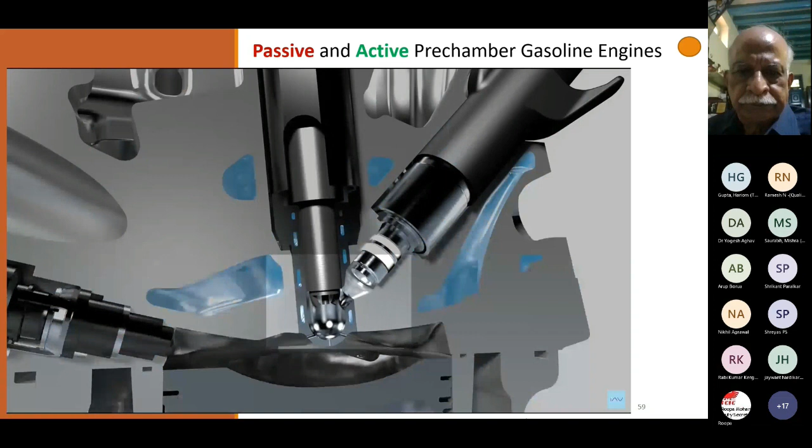It enriches the mixture in the pre-chamber to such an extent that optimum ignition conditions prevail in the pre-chamber, even with extensive charge dilution. In contrast to other active pre-chamber systems, tests with IAV's active solution revealed particularly low HC and particulate matter emission levels.

Further tests with the pre-chamber, in combination with other technologies like the Miller cycle or high external EGR rates, have confirmed the high potential that the pre-chamber has. Based on that, we are convinced that it is an evolutionary technology which can be used in future powertrain concepts. Pre-chamber ignition is part of the intelligent powertrain that we are developing with and for our customers. Our pre-chamber ignition solution is an investment in the future.

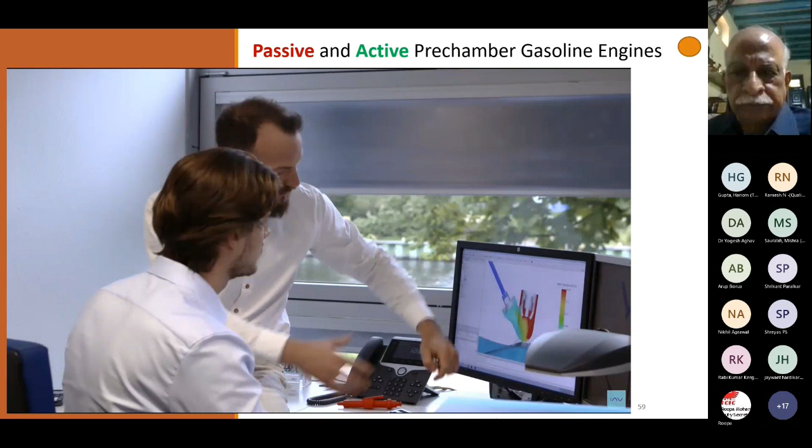So we have active pre-chamber systems available from companies like Mahle that you can introduce in our cylinder heads, for example, and then develop a good hydrogen engine. Such engines are developed by Liebherr in Germany and JCB in the UK, and they are really heavy duty engines which run at 70 to 75% full load constantly.

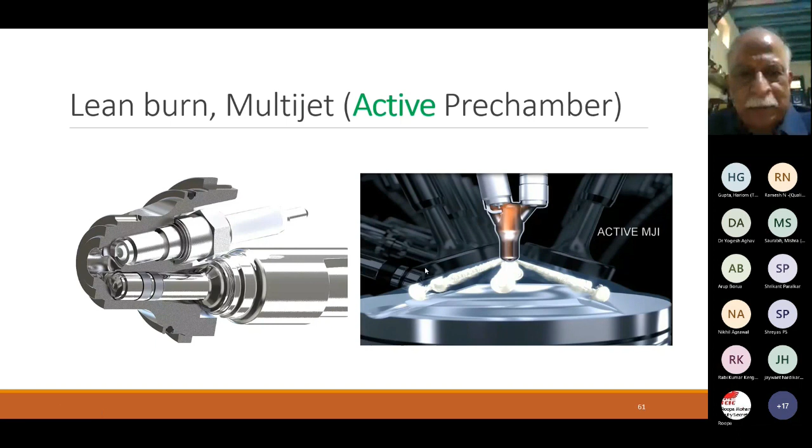Now we will see this system available for development of hydrogen engine. You can get this special pre-chamber with injector and spark plug from well-known fuel injection companies, and you can introduce that into the cylinder head design, and create an active pre-chamber system. So here we see a movie.

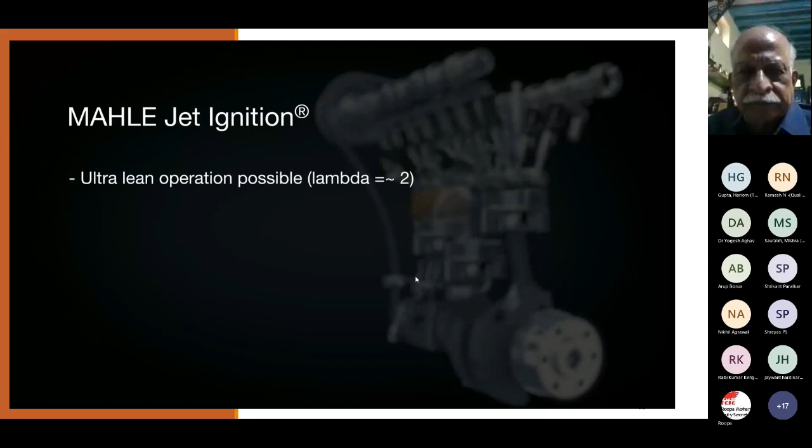As a summary, we can have an active pre-chamber system with ultra lean operation up to lambda 2.2 or 2, with 10% improvement in fuel efficiency and 95% lower nitric oxide at the engine out, and of course we avoided knock in the engine.

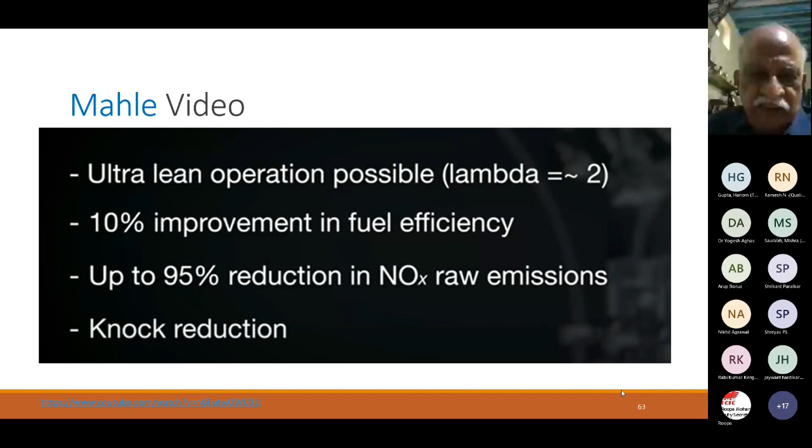With this, I would like to conclude my presentation by showing how we selected. We will just go through the route again. We have hydrogen. We chose lean combustion for low nitric oxide, and we selected turbo intercooled engine, and we went for direct injection with say boost 2.5 for enhanced power.

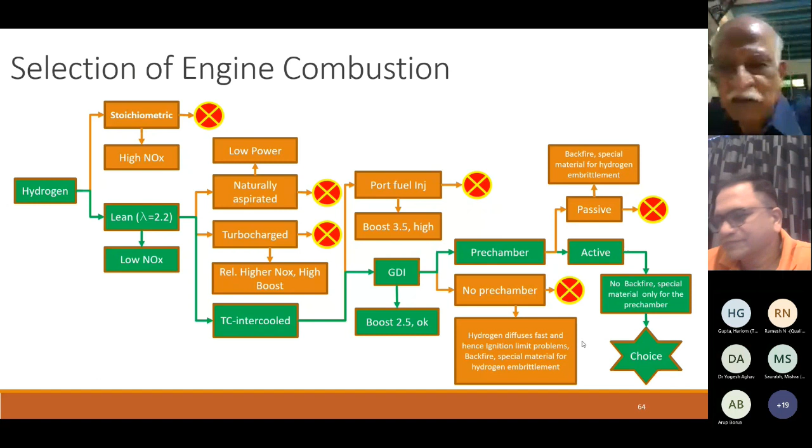Then we went for the pre-chamber option, and in the pre-chamber option we preferred active to passive. There is no backfire. We need one special material only for the pre-chamber, and we have a nice hydrogen engine where we can use the same material as we have used for our regular engines, except for the pre-chamber and probably for the valve.

Thank you very much for your attention. There are some references given. Those who are interested can read this. Thank you again.

Thank you so much, Dr. Lakshminarayan sir. So much of in-depth technical knowledge sharing, starting from engineering, chemistry, and physics, based on data, facts, and conclusion on design of heavy-duty hydrogen engine. Thank you so much, sir.

And I see in the chat box a lot of appreciation comments are coming up, and also Dr. S. Devarajan sir has also joined with us in the session. He's senior vice president BCIC and senior vice president TVS Motor. Thank you, sir, for joining.

Very, very interesting, Dr. Lakshminarayan. Outstanding. I think I learned a lot of things. I joined a little bit late, but very, very interesting. I think we should have a much more detailed discussion with you. One of the few questions I have is, will it cause anything on the emission atmosphere, which causes headache and other dizziness if it leaks to the atmosphere?

No, if hydrogen leaks, it goes up in the atmosphere because it's very, very light. So it is said that there is no danger if it leaks. But BMW have developed some hydrogen based vehicles, fuel cell vehicles, etc, and they advise not to have the vehicles inside a garage. They want us to leave the vehicle in the open till they prove the safety of the vehicle in closed spaces. So a hydrogen vehicle must be left in the open, because even if hydrogen collects inside, it goes up, and if it cannot escape into the atmosphere, it can collect at the top very near to the ceiling, and a small spark, maybe two iron rods clashing against each other, can produce a spark and create a big fire. So only thing is, we must leave the hydrogen vehicles in the open till the experts advise some methods.